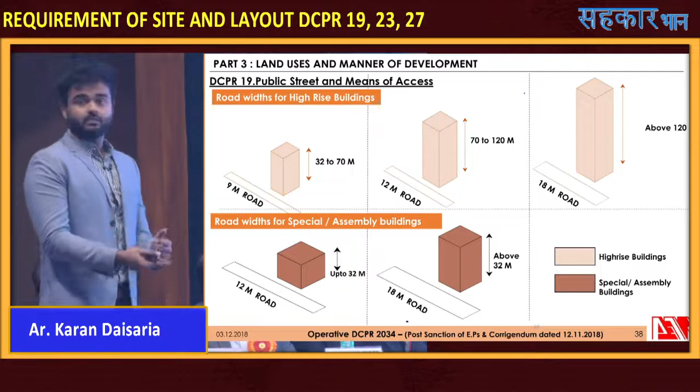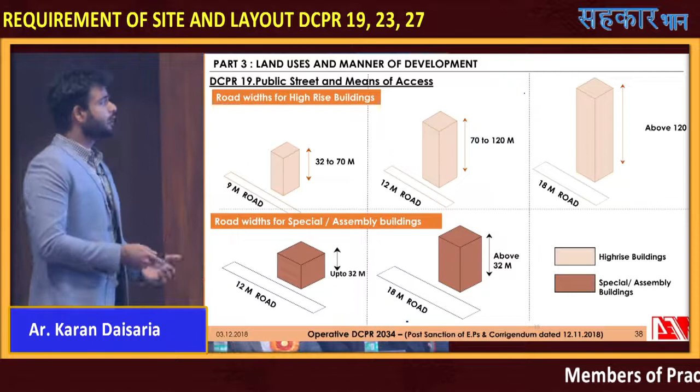If you have a 9-meter road abutting your plot, the building height can be up to 70 meters. For 12 meters, you shall be allowed development of 70 to 120 meters, and for 18 meters, there's no limit—it could go above 120 meters. For special and assembly buildings, you need a minimum 12-meter road for development up to 32 meters, and an 18-meter road for more than 32 meters.

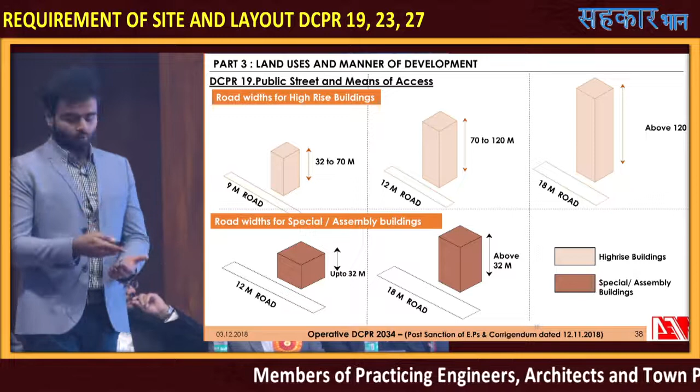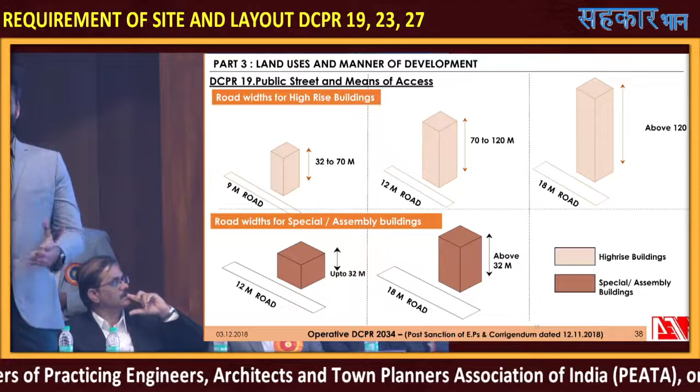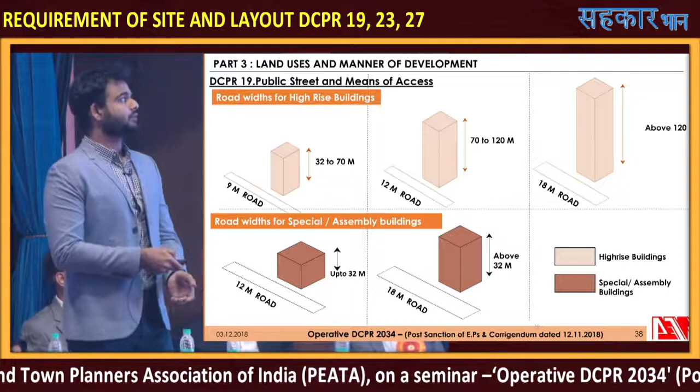Now there are two special scenarios for public street and means of access. One scenario is, since we are always talking about FSI and its implications on the basis of a 9-meter wide road, but what if you have a plot which is abutting two 6-meter roads? In that case, for 70-meter height of the building, the Honorable Commissioner may allow it if the plot is abutting two 6-meter roads.

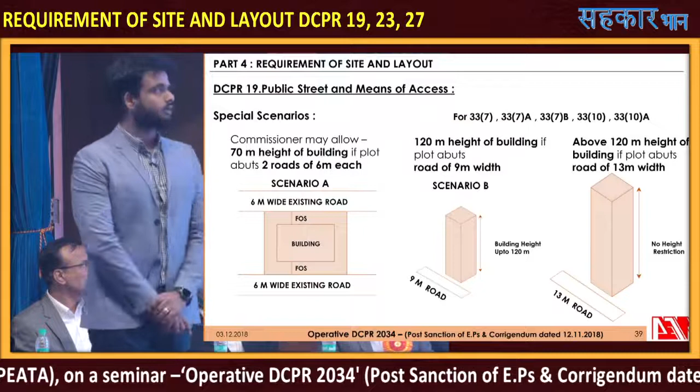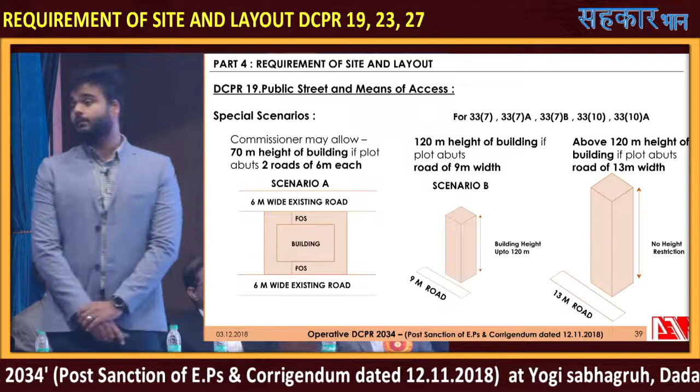In case of the second scenario, for 33.7, 33.7a, B, 33.10 and 33.10a, if you have a 9-meter road, you can have a building height up to 120 meters, and if it is a 13-meter road, then there shall be no height restriction for these specific DCR regulations.

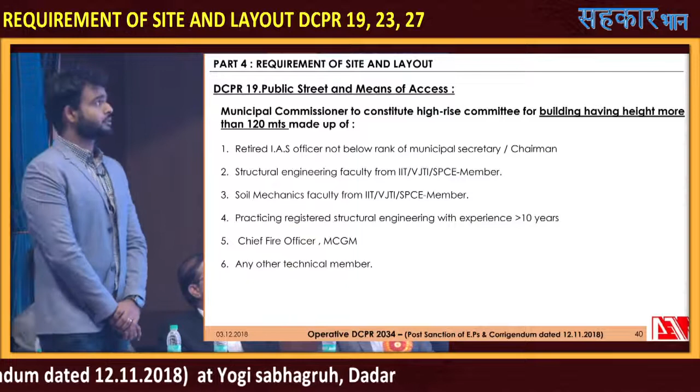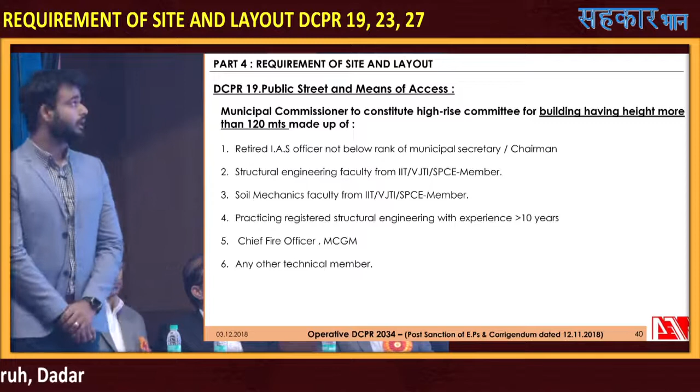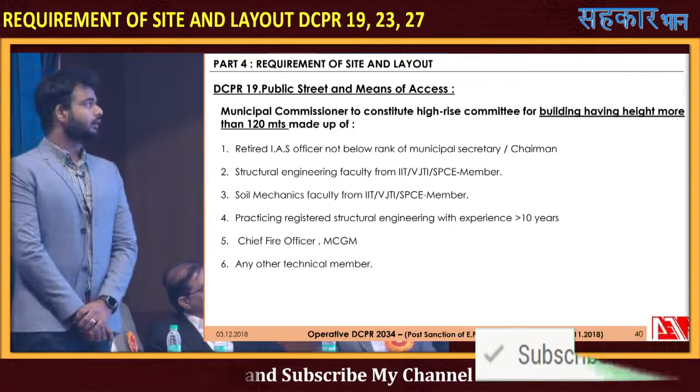Further, the Municipal Commissioner shall constitute a high-rise committee for buildings having height more than 120 meters, which shall be made up of a retired IAS officer, a structural engineer, a soil mechanics faculty, a practicing registered structural engineer with experience of more than 10 years, and a chief fire officer of MCGM, and any other technical member as deemed honorable. High-rise is above 120 meters only.

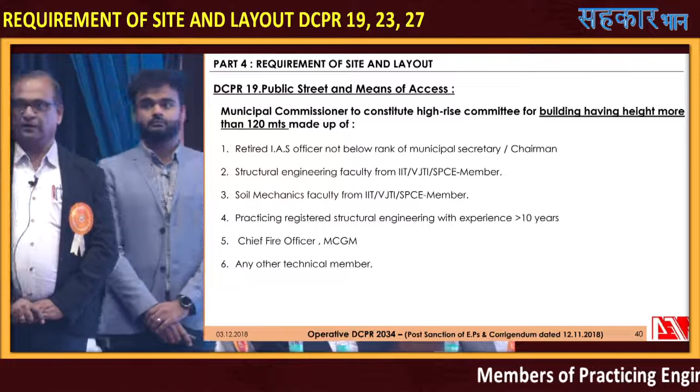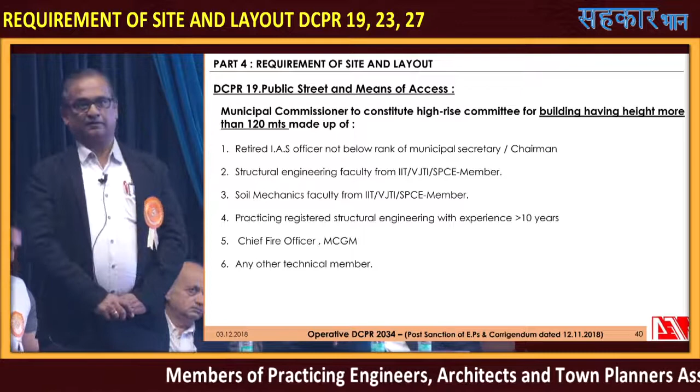Earlier it was 70 meters, which has now been shifted to 120 meters. So if you are proposing a building within 120 meters, there is no high-rise committee. Only if the building height rises above 120 meters will the proposals be routed through a high-rise committee.

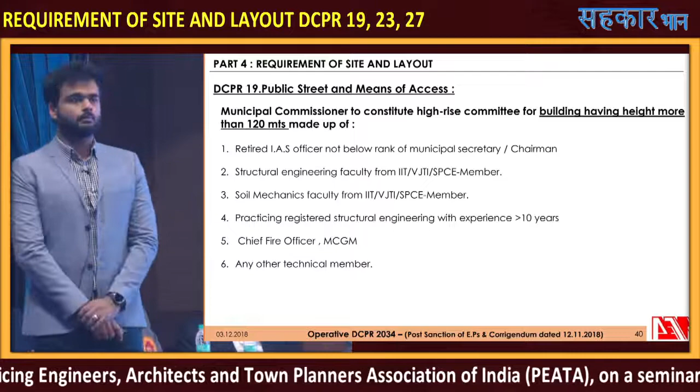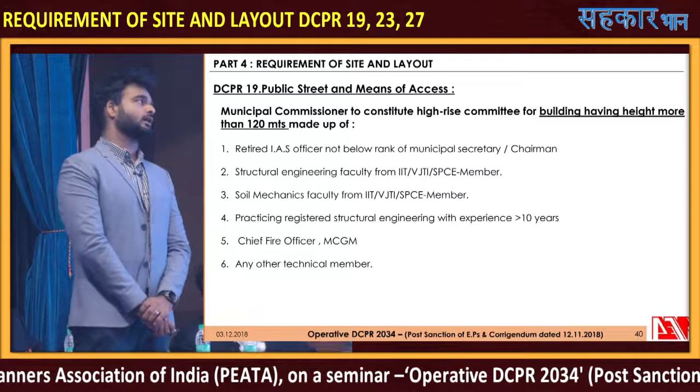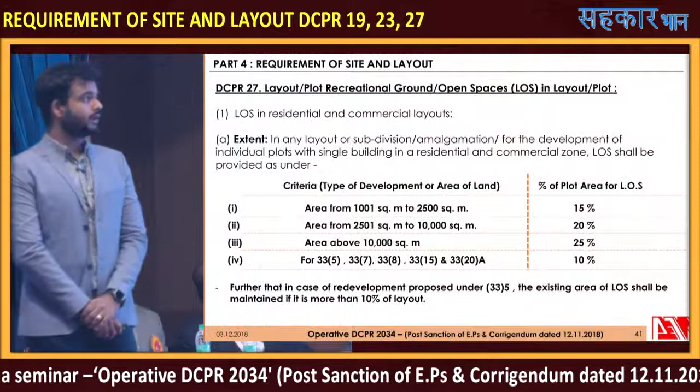Now the open space has become the LOS, which is layout open space, in which the criteria are as per the total area of the plot. So for plots of area 1001 to 2500—plots of 1000 or below do not need to provide an LOS—from 1000 to 2500, 15% of the plot area shall be given as layout open space.

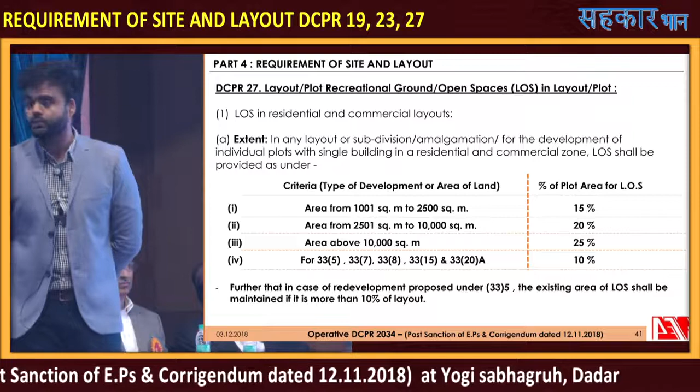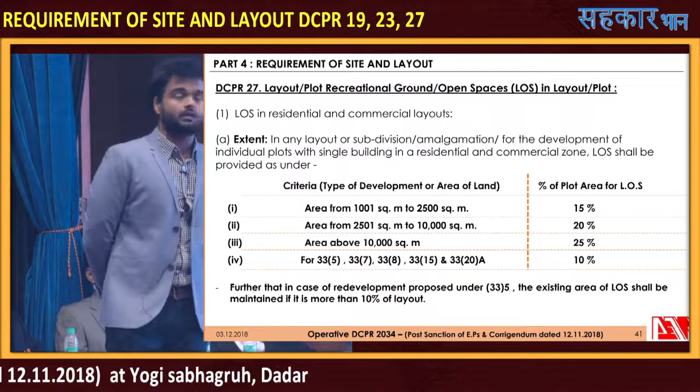For area 2501 to 10,000 it shall be 20%, above 10,000 it shall be 25%. In case of 33.5, 33.7, 8, 15 and 33.20a, you shall be liable only to provide 10% of the total plot area as layout open space. It was earlier 8%, which has now been increased to 10%.

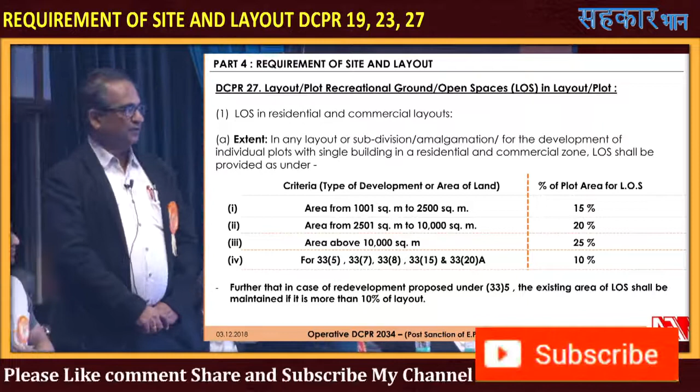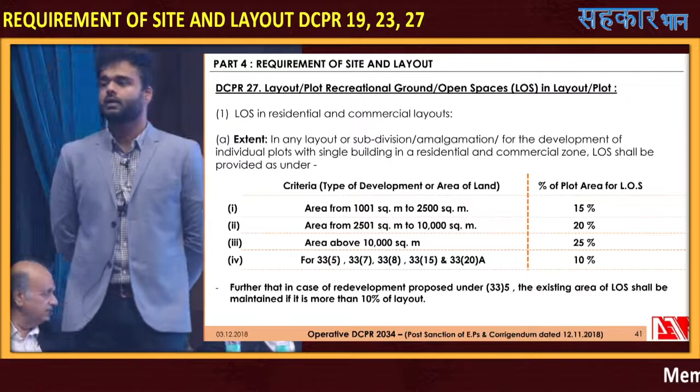But further, in case of redevelopment proposed under 33.5, if the existing open space is more than 10%, then you shall give the existing amount of area as layout open space.

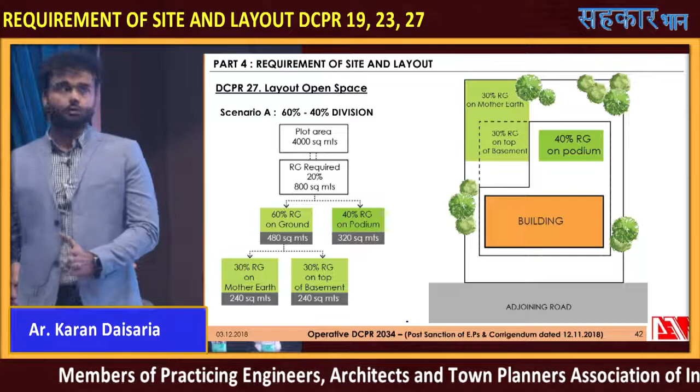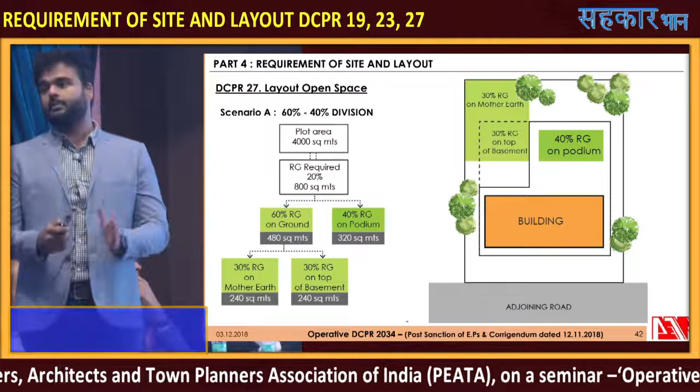Now, where does all this layout open space go in your plot? There are two scenarios. One is the 60-40% ratio, wherein 60% of the RG is on ground and 40% of it is on the podium. In that case, 50% of the 60%, which is 30%, has to be on virgin Mother Earth, and 30% shall be allowed on top of the basement. The remaining 40% is obviously on the podium.

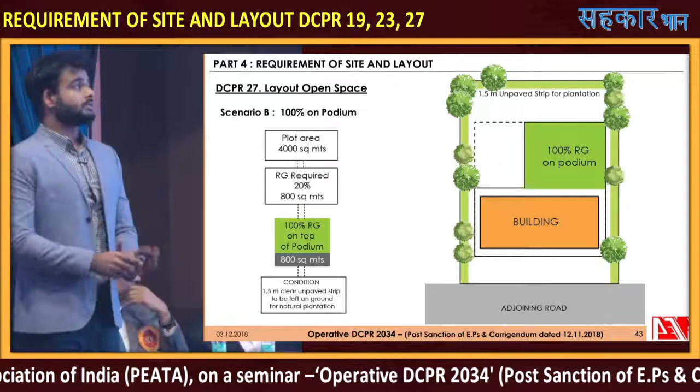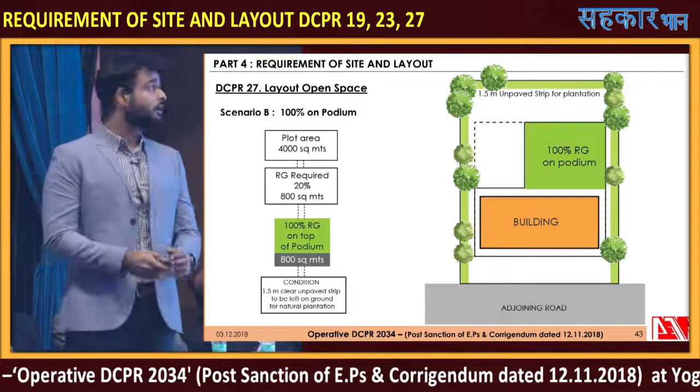The second scenario, which is in the DCPR 2034, is 100% RG on the podium. You shall be allowed to provide the entire required 100% RG on the podium. The only major condition is that there has to be a 1.5 meter unpaved strip for plantation all over your plot on the ground.

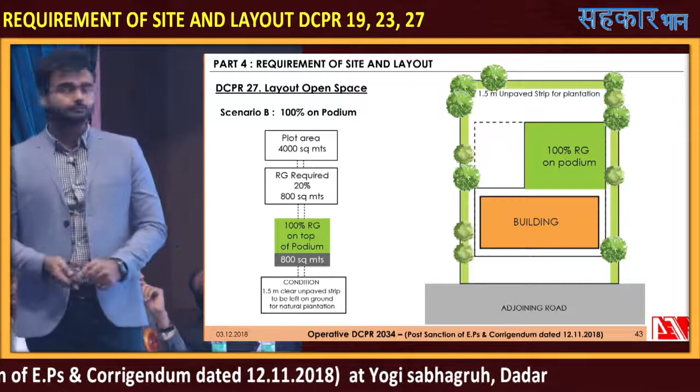Now in these layout open spaces, one thing that has been added is the construction of a solid waste management system as per the NBC Code of India in layout open spaces having plot area 2000 square meters and above, within 10% of the layout open space area.